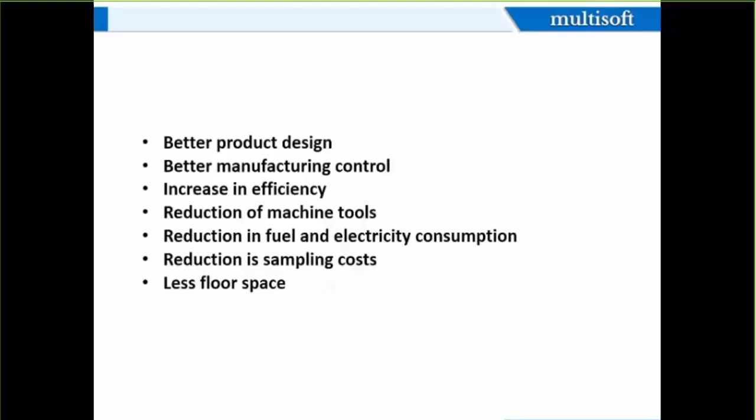So let's see some history and all kinds of things, because you know that in the Second World War - we also invented an airplane in 1903. After that we used the airplane in war. In the Second World War, they could make an airplane or a fighter plane on paper. Everything was on paper, but it's really hard to handle it. So what could we do? We made a kind of software.

So just see, there is some software from the 60s, 70s - there is one software called CATIA, which is a France-based company, from 1981 and the 70s also. Maybe you've heard about Dassault Systemes. It's a very big company of France, which especially made fighter planes of France, and is also providing to some other countries also. So they made a software for itself. It is called CATIA, and some other companies also there.

They make ProE for their own company and also AutoCAD. So basically they need a high quality product, that's why they make software like that. SolidWorks is also there, ProE is also there, and they also provide some affordable packages to other countries.

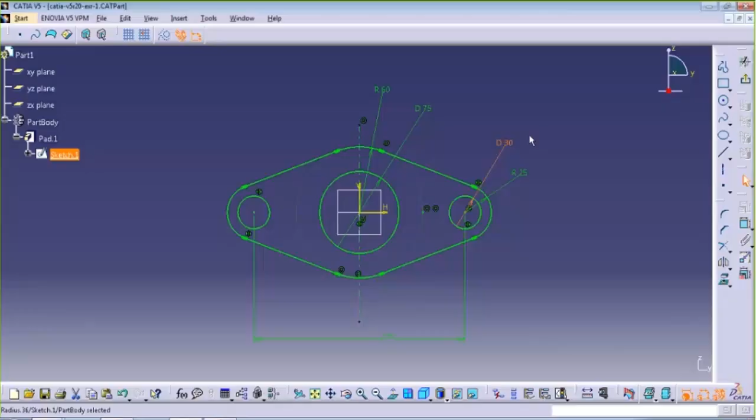If you specify, here is a 30 diameter. If you see it, here is a 30 diameter. Why did I give a 30 diameter? Because there should be a hole of 30 diameter, since we need a nut and bolt. It should be less than M30, that's why I created a 30 diameter. So everything is accounted for in that case. See, it's a very simple part.

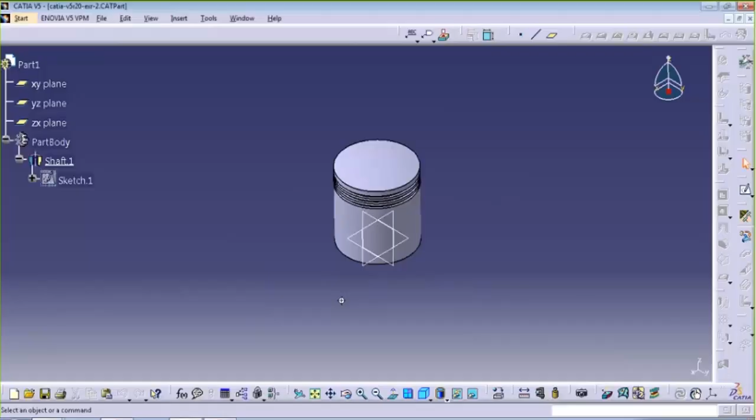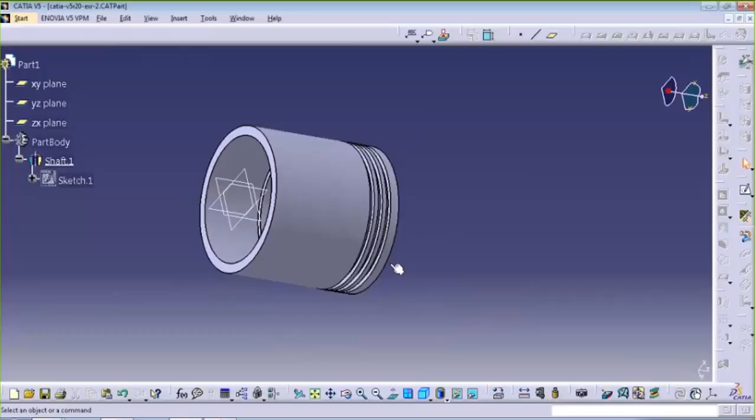Now I will show you another part. See, it's a piston, it's a circular part. If you see it, it's a circular part.

Now it's a circular part, so how would you create it? How would you manufacture it? So all of this is decided here. I will give you the section view of it. Maybe you know what a section view is. Okay, see it later.

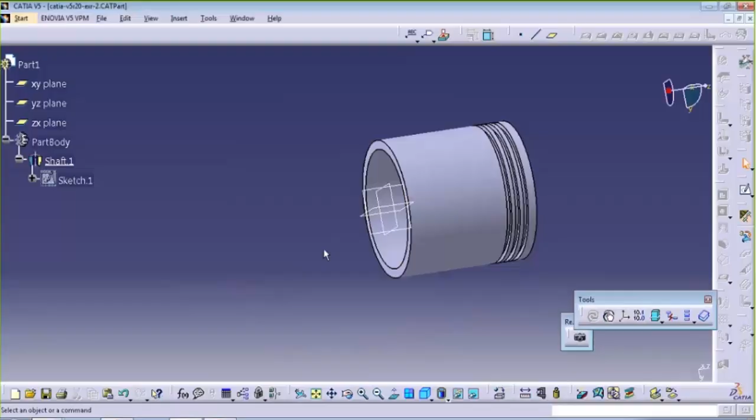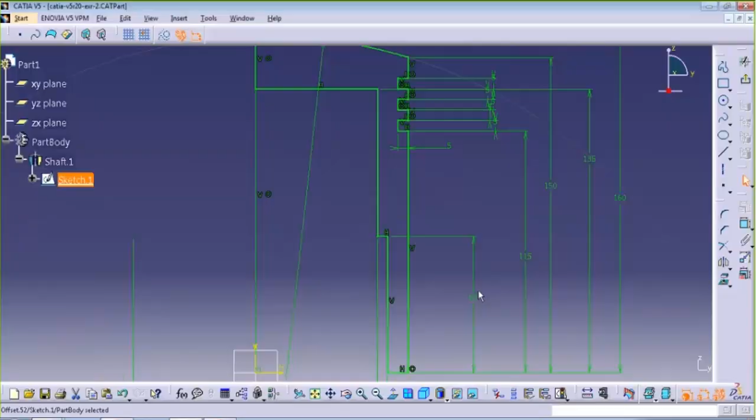You see it. Now I will give you some testing thing. See, now everybody right now is using a smartphone. So you see your smartphone, there's a back cover of it. It's not exactly the back cover of a smartphone, but it's a kind of similar thing. Okay, now how will I create it?

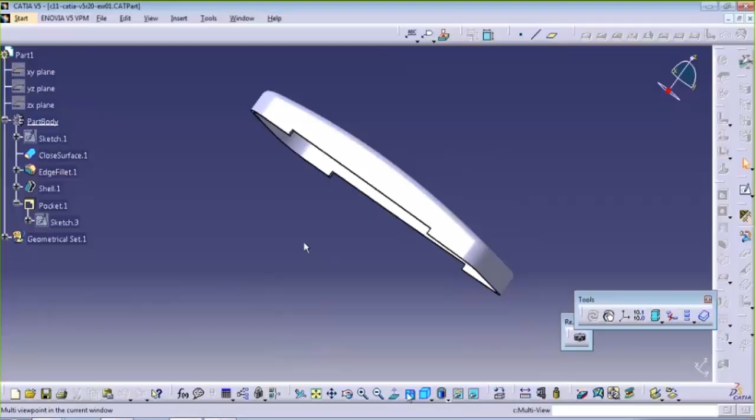Now if you see it in a different view, it shows a different side. See, there are lots of curves here, all kinds of curves. That is a curve, now there is another curve. See, the oval shape is there, and this is an isometric view.

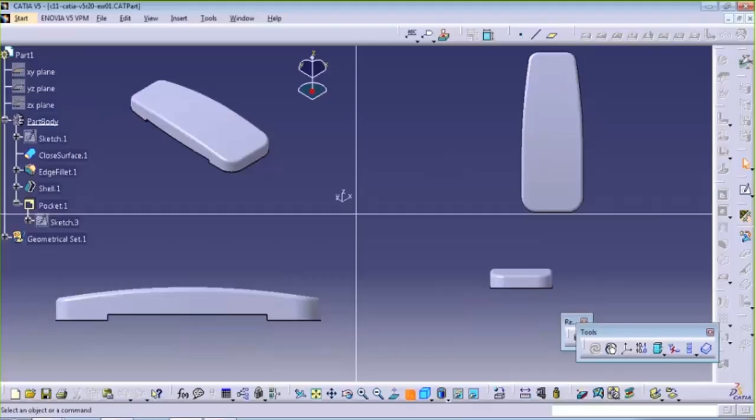So how will I create that typical part? We use CATIA. CATIA is basically used in the aviation sector. Why the aviation sector? See, if you see any kind of aeroplane right now, they are using a very good curve. Why a curve? Because they want to minimize air drag. So they use very good curves. And if you see the turbo engine, there is also a blade, and in the blade there's also a disc. So there are lots of curves.

For that kind of curve, we use surfaces. We call them surfaces in CATIA, and other software too, but mostly in the surface industry we use CATIA. So if you see, there are lots of surfaces. See how we design it.

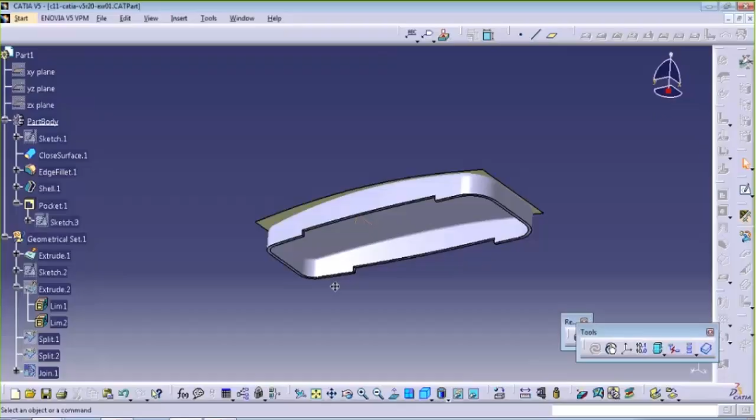If you see, there is some yellow portion. First I draw that kind of curve. I just hide my 3D model. First I draw this. Then I introduce this thing. See?

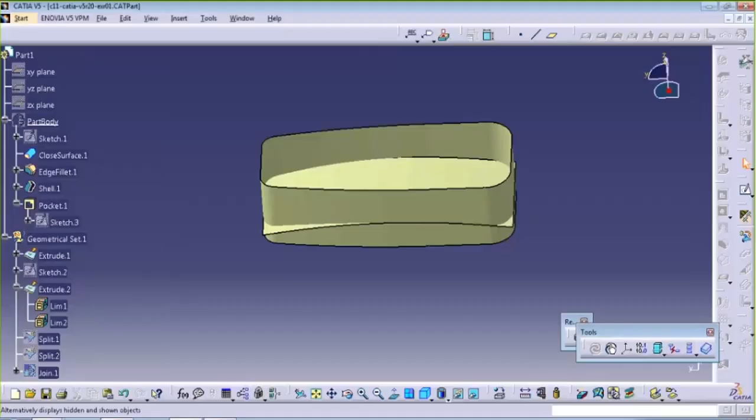Then I split it. If you've seen it, see, I have this thing. Now I split it again. We have this thing, and we have joined this. In surface designing, we can create any model, any kind of model very easily, which has any kind of surfaces.

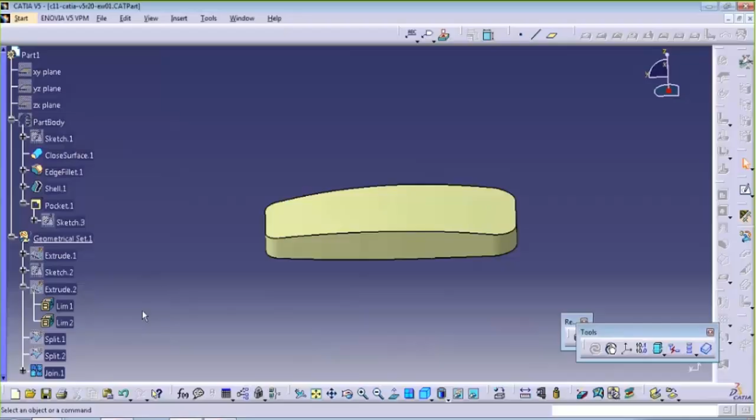Now it's a surface. If you see, a surface doesn't have any thickness. It has a negligible thickness. See, there is a negligible thickness. So we have to add material. I hide this and unhide my 3D model. See, there are some thicknesses here. So that's the difference between a surface model and a 3D model.

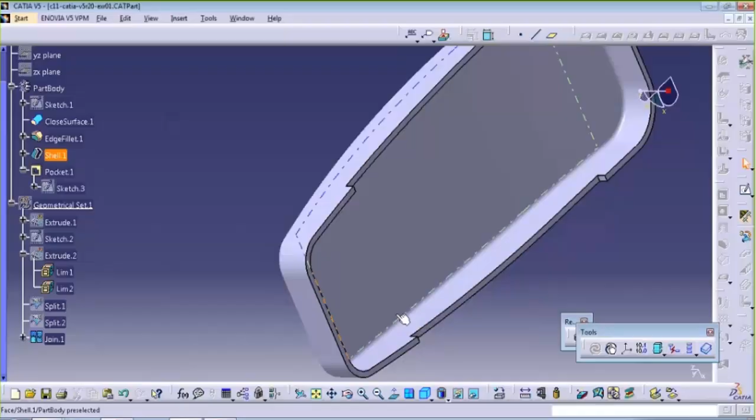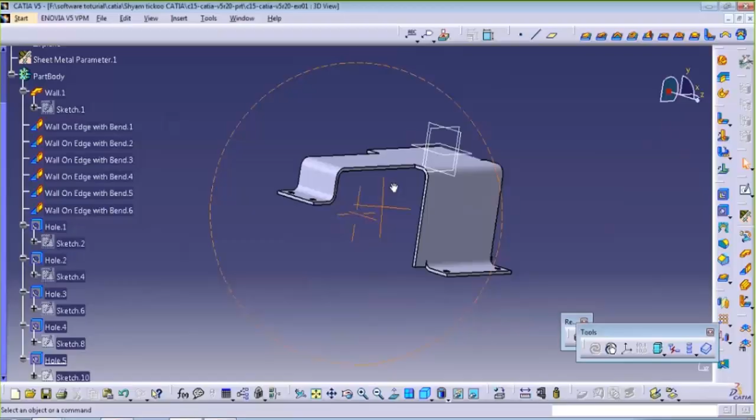Now we talk about this thing. Let's see something very simple. See, it's a sheet metal. Everybody knows what sheet metal is. Sheet metal is a specific thickness which is applied all over the part.

If you see, it's a thickness. So what is the thickness? There, the thickness is 1 mm. So 1 mm thickness is applied all over. We have an environment in this kind of software where we can provide any kind of engineering feature, whatever you learn in your technical course and B.Tech career.

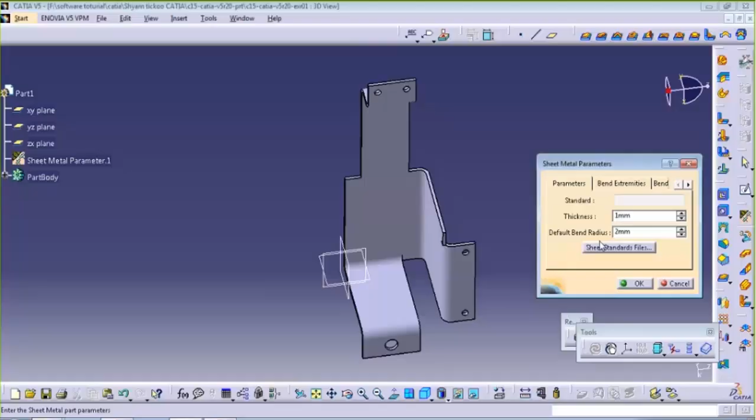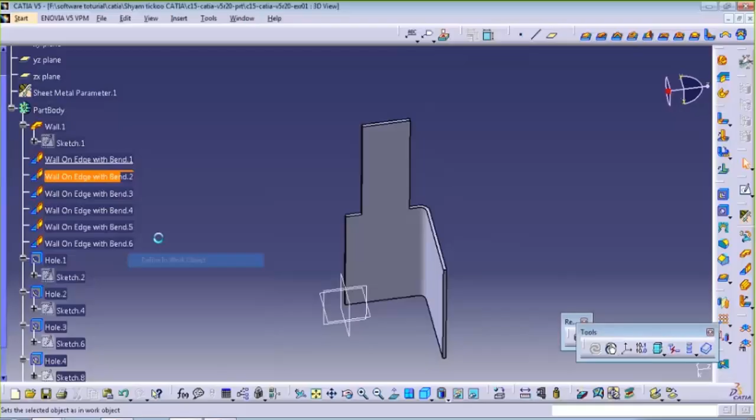So I'm providing a 1 mm thickness, and the second thing is the default bend radius. Now see, how will I draw it? First I draw this thing, then I attach a wall, then I attach another wall. I just attach walls again and again, providing a bend, so you can see here is a 2 mm radius.

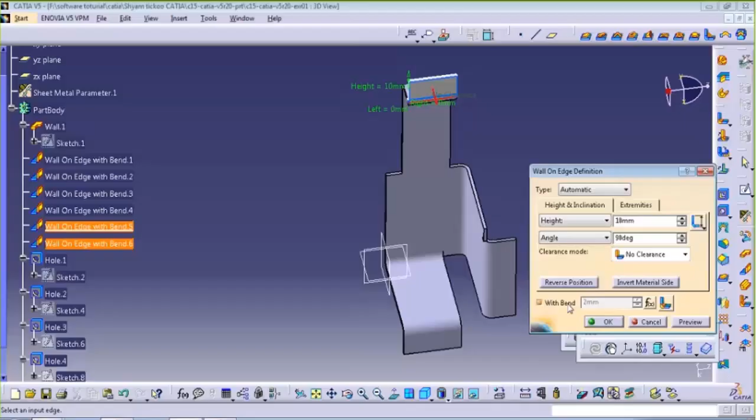So if I click here, see, it's automatically taken, the radius is 2 mm. You can change it further, and now I provided some hole there.

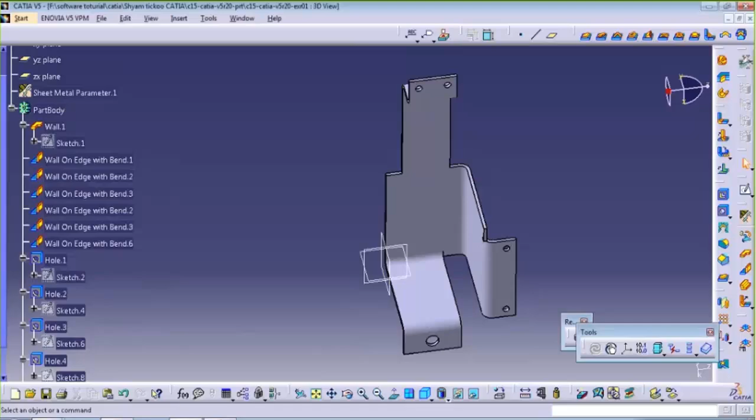Now you see, in a CAD software, except AutoCAD, any kind of CAD software has a tree on the left hand side which is very useful for working with your model. Just like I click here, so now I see this hole. I double click on it to show the specifications. It's a 4 mm hole, and you see some positions are there - 9 mm from that edge, 4 mm from the bottom edge.

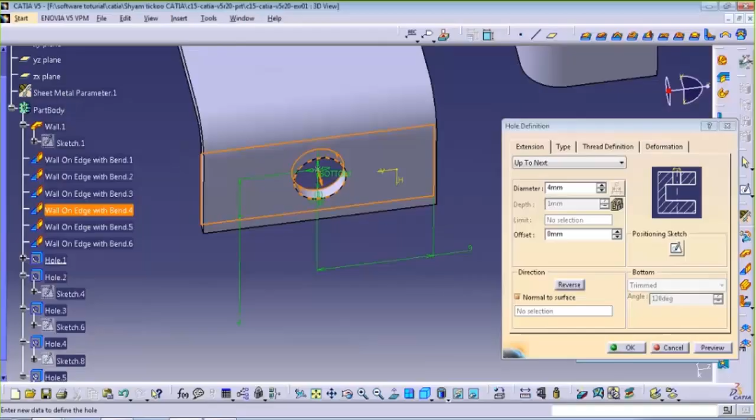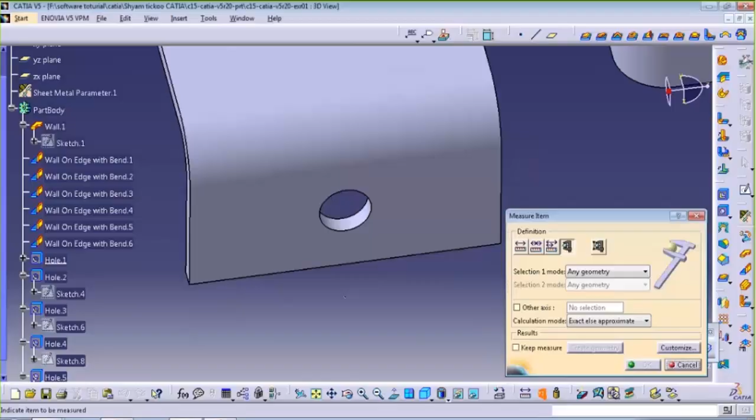So you can change any parameter at any stage. Suppose I just change it to 3. Now click OK. Now it's become 3. How will I know that it is 3 or not? I just check it. See, it's showing the radius.

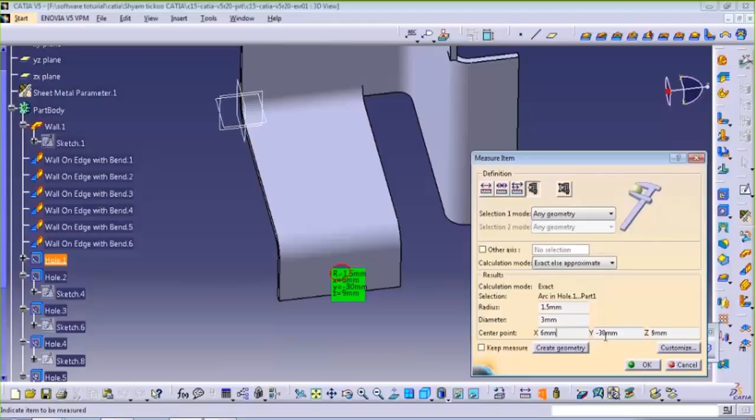So I just change it to show diameter. Now this is the diameter, and it's also showing some position in X, Y, Z, because it's a 3D model. So of course there is some 3-dimensional position, and the position is of a center point. If you want to know where the origin of this center point is, it's here - it's a cross section of the 3 default planes. You can change the origin, all things.

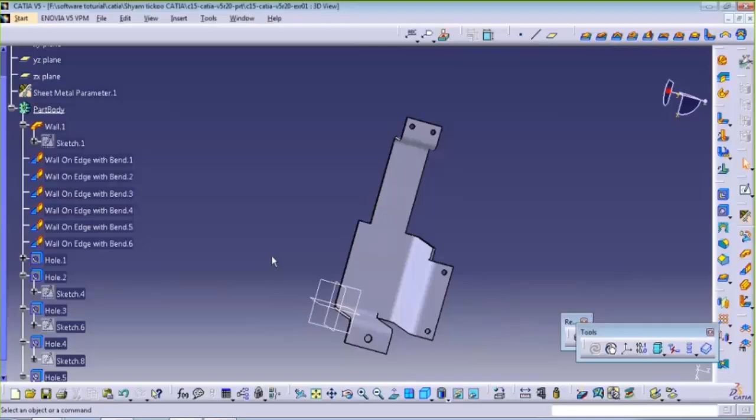Now if you see, this is my sheet metal, suppose the whole sheet metal is there, but how will you determine the raw material size? There is some other option in sheet metal. See, if I click here, now it shows the maximum dimension - the maximum length, breadth, and all things.

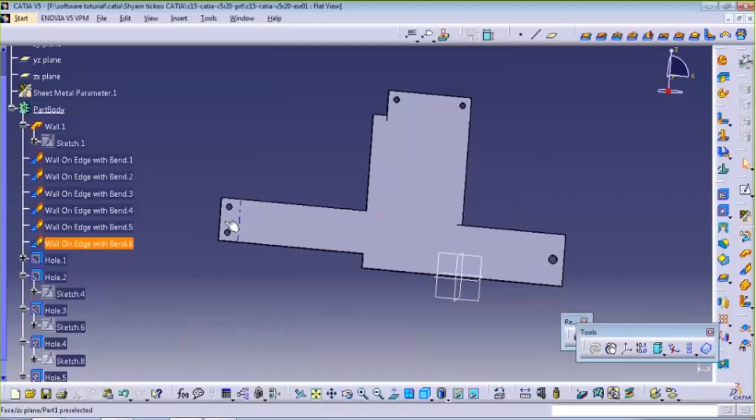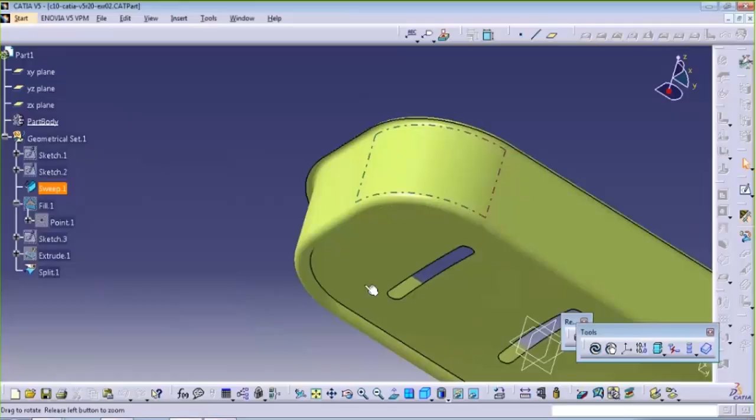Now this is some other model. See, this is like a bucket, and it's completely designed using surfaces. We don't use any kind of 3D solid model, it's a surface. If you see, there is a curve, there are lots of curves, and those handle curves too. So for that kind of typical curve, we use surface designing.

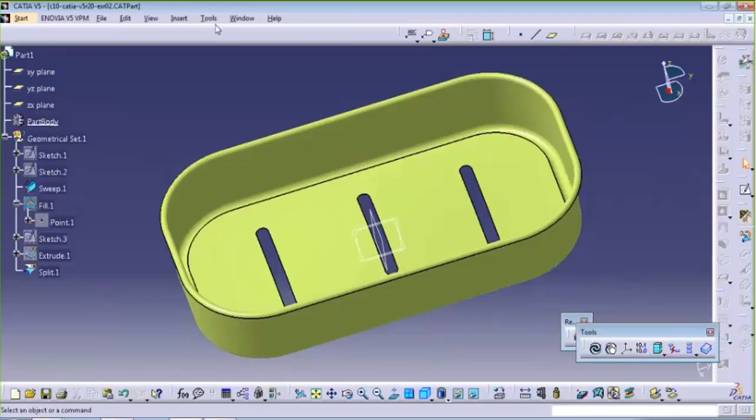Now, maybe you've seen that part before. We use that software very easily.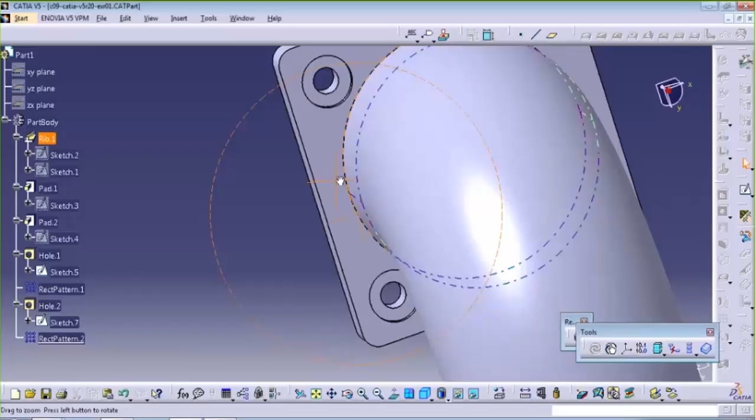Now if you see, there is a hole, there are 4 holes: this one, this one, this one. See, I just check it. First I draw this hole.

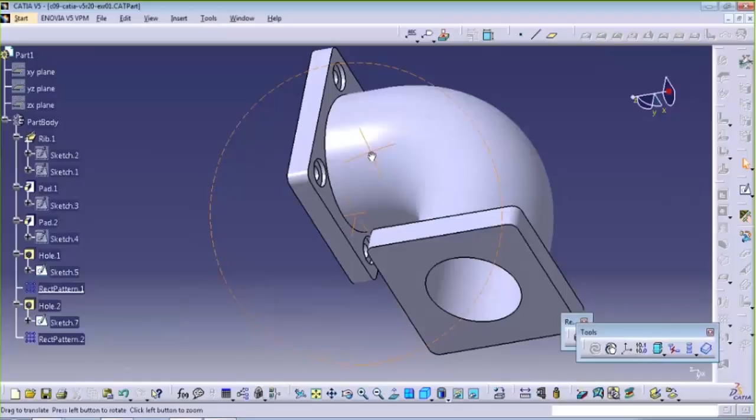Now if you want that hole in multiple positions, you can just create a pattern. So I just create a pattern. Now what is the use of that pattern? Because you have to just specify one parameter in that part design, and the pattern is just a replica of the whole parameter of it.

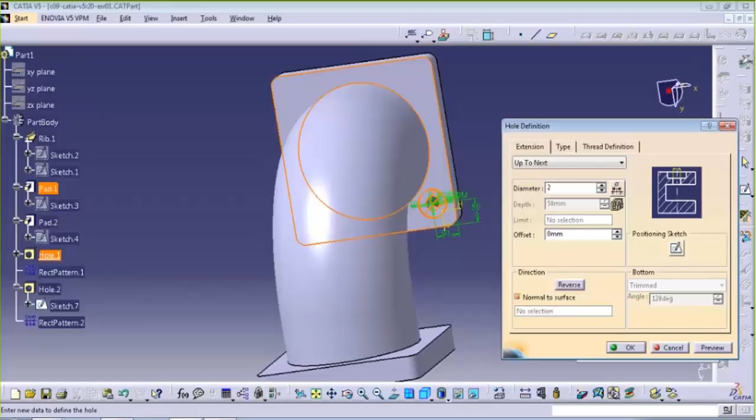So if you want to just change one parameter, say it's a 30 diameter hole with a counter bore, and the counter bore diameter is 60, I just change it from 30 to 25. It also replicates to the other three holes if I change this.

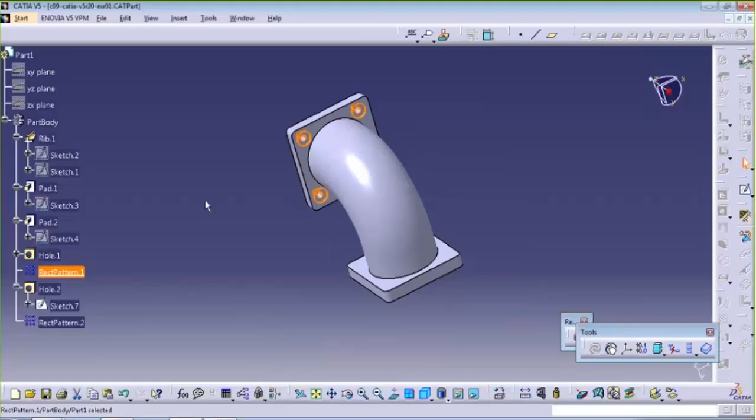So that's an easy thing when you're using any kind of design software, just like Creo, SolidWorks, Unigraphics are also there. There are some useful things there.

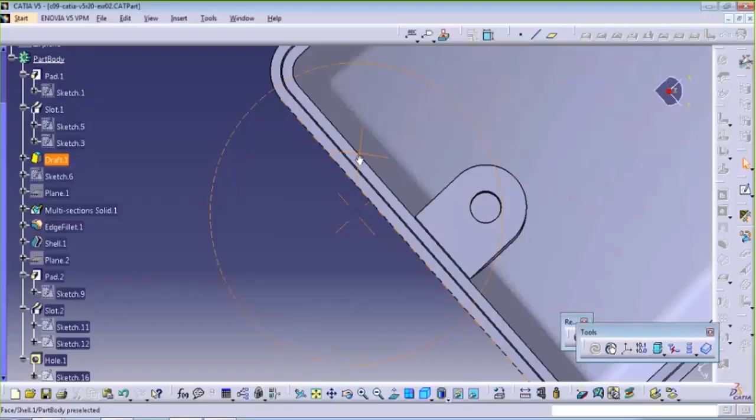Now see, there is some other kind of part. If you see, this is not sheet metal. See that carefully, this is not sheet metal. There is a gap, it's less. There is some other gap, and it's a different kind of product, because sheet metal is very hard to make like this.

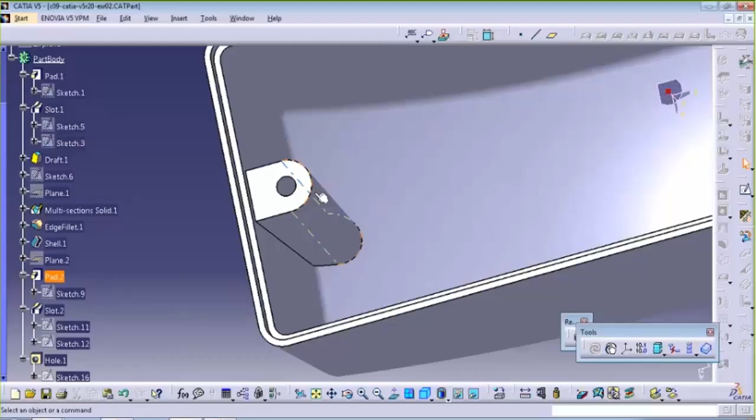Now, okay, this is all a 3D model, but in practical industry, after the 3D model, you have to represent your data to the customer and any other person, and you have to share all the 3D data to other customers. So how will you share it?

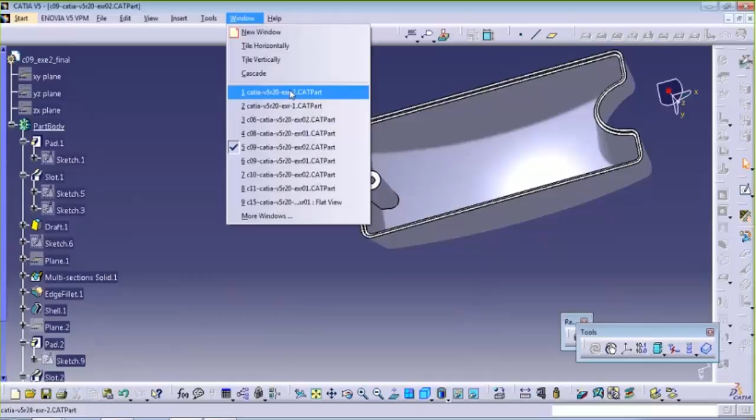You have to create the 3D model into a drafting portion, which is all the history we said, that we have created a 2D model basically. So suppose I just have this part.

Say this one, this is a simple one. So you have to create a drafting part. So how am I just creating a drawing?

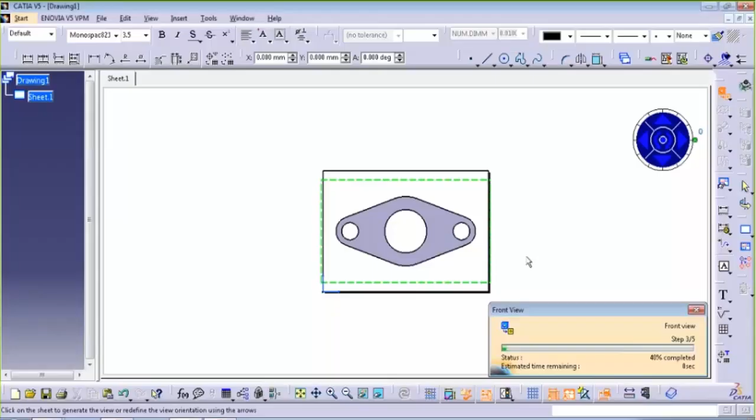Now it's showing some interesting things. It's showing the front view, scale also shows there. Now you have to specify the dimension of it.

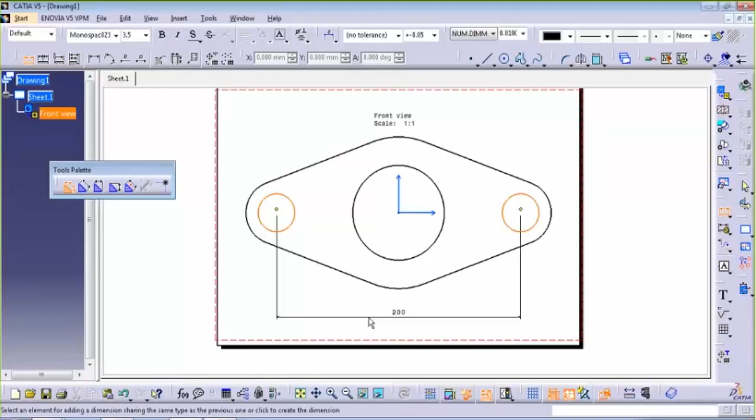So I just specify the dimensions. See this, this, this one. Okay, so I just specify the whole dimension.

And you can also specify symbols, welding symbols are also there, roughness symbols also there. And if you want to put any text here, suppose this is a circle, so it doesn't show any center line. If you want to create a center line, there are some other options too.

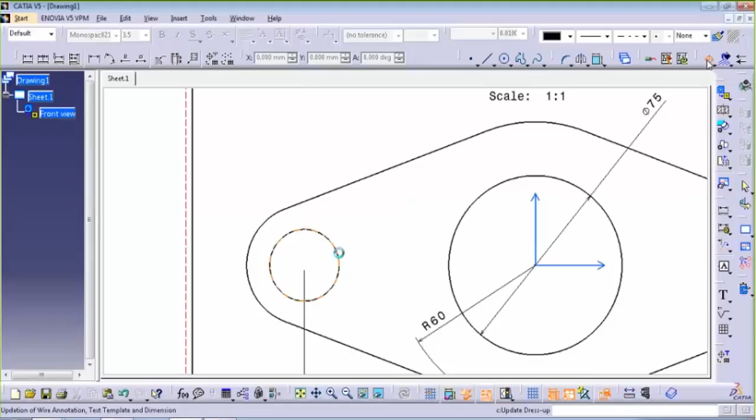See, now it's showing the center line.

See, so for a different part, we have a different approach. So it's a drafting thing.

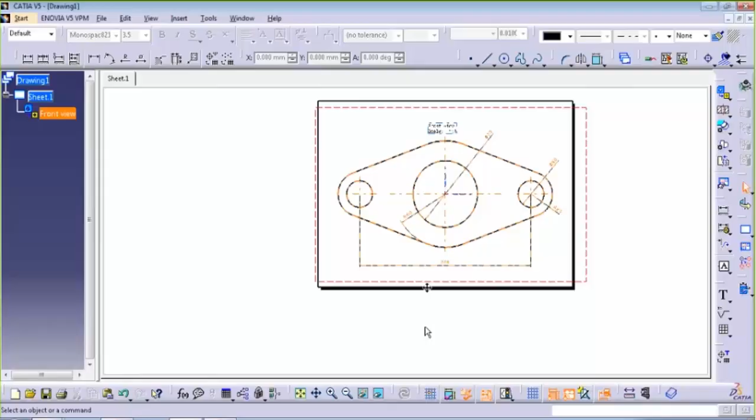Suppose I just project some another part, say this one is a piston. So I just show it like this.

But I want to see the inside of it because it's hollow inside. If you see this, it's hollow inside with some other thicknesses. So if you want to show this,

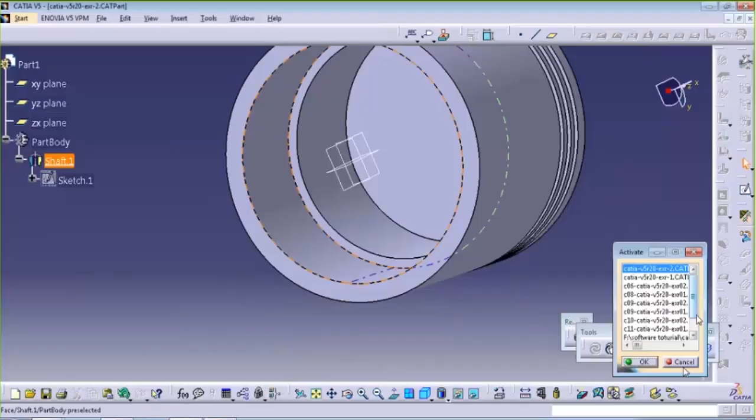I just create a cut in between them.

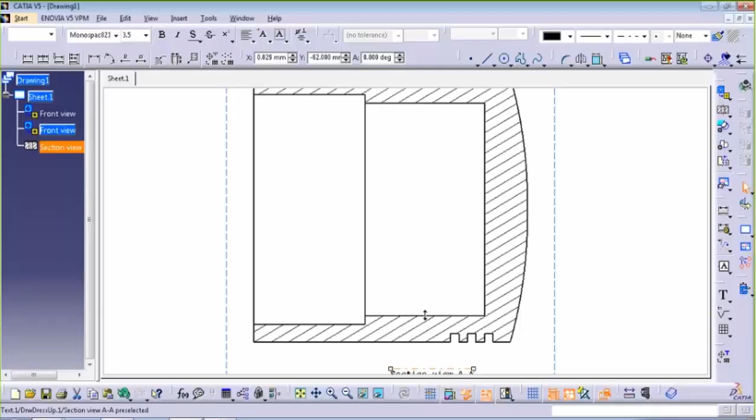See, now we have a different section of it. So if you want to specify the dimension, you can specify the inside diameter is say 120, and specify some other dimensions easily.

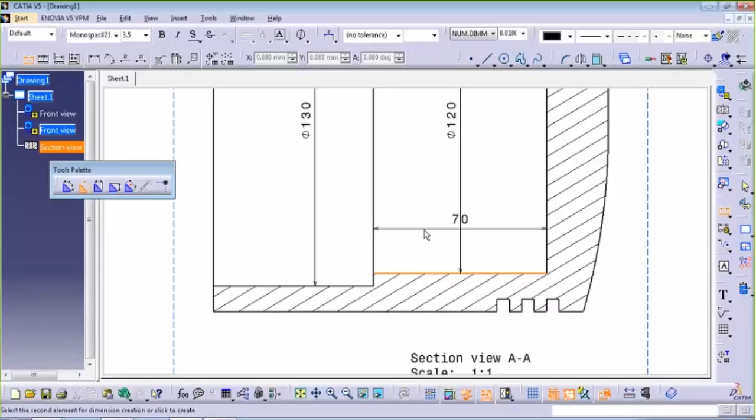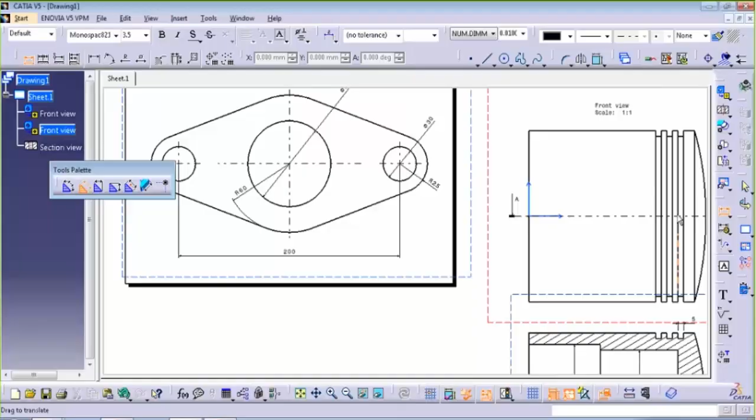So this is a very useful thing if you know the drafting part also, because when we use a 3D model, it's basically the whole thing, it applies to the analysis part also.

Suppose I just show you some analysis part in CATIA. So just before you specify any analysis part, there should be some material. So I just first specify the material.

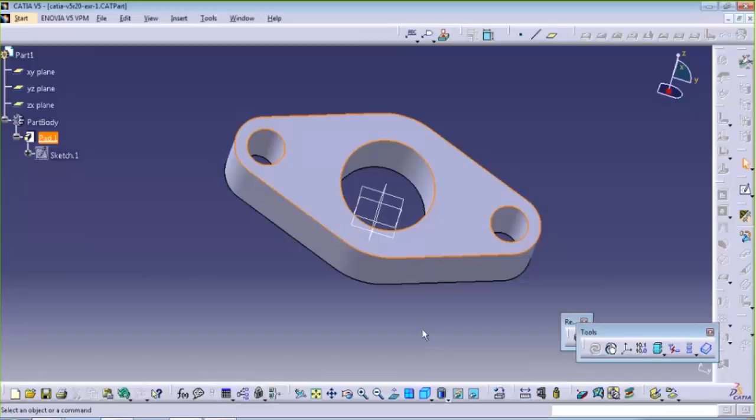So suppose this is my titanium part. Okay, if I put titanium, see, if you see in the tree, it's titanium. So I just double click on it.

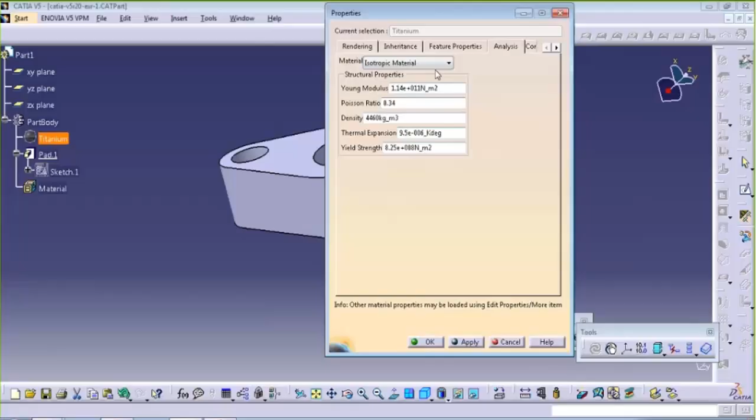See, it shows the default values: some density, some yield strength, and all the engineering properties. So I just click OK.

See, if I put titanium, the color, the appearance of this model doesn't change. So I just change the appearance. Show some black, I just put it back on.

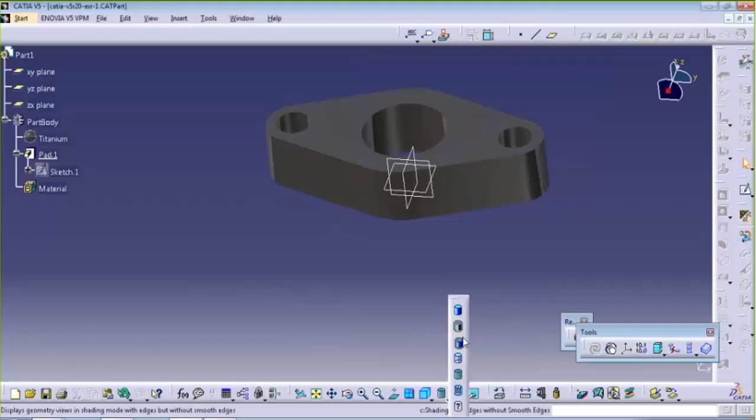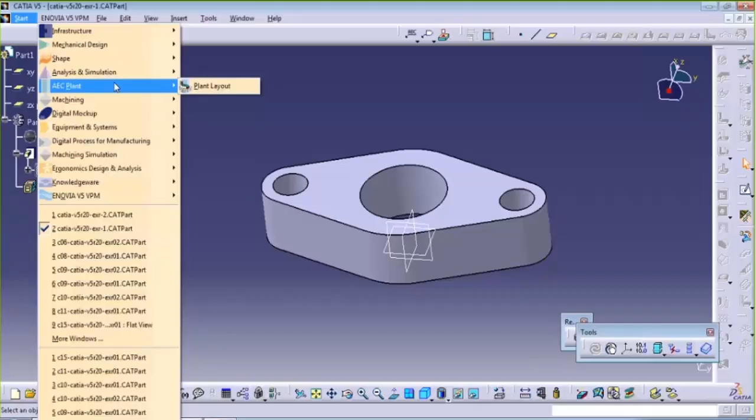Now I am doing some analysis part. Now let's see, say static analysis.

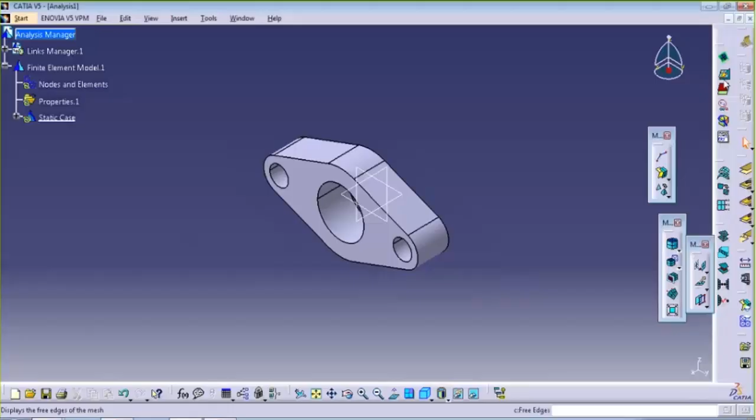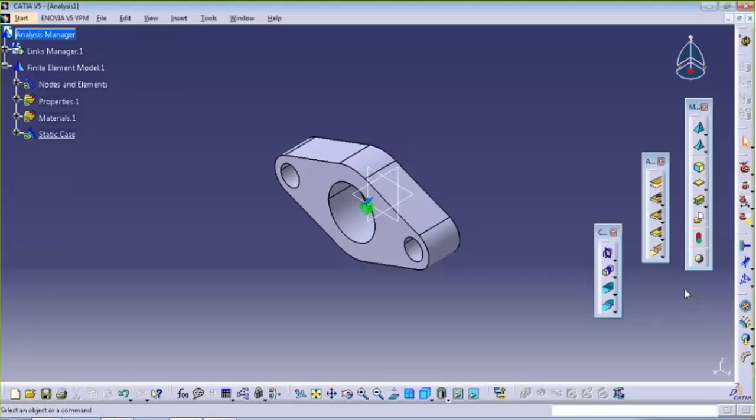Now see, I just want to fix this part. So I'll fix this surface and this surface, because this is a bolted hole, so it is automatically a fix. Fix this one, and I just put a load here.

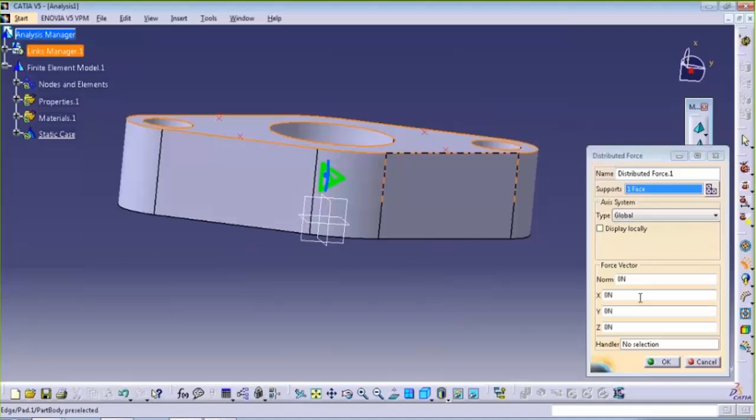Suppose on this first surface, and how much force is applied, suppose in x direction is downward. So I put in a negative 200 Newton. Okay.

Now to compute it, it's a very small analysis. Now analysis part is done. Now see the result. See,

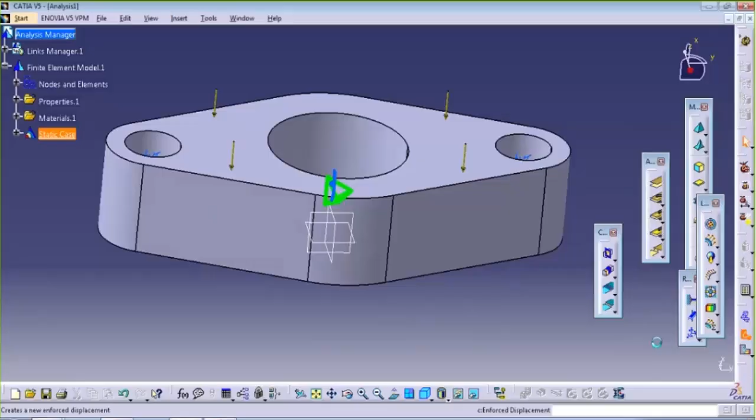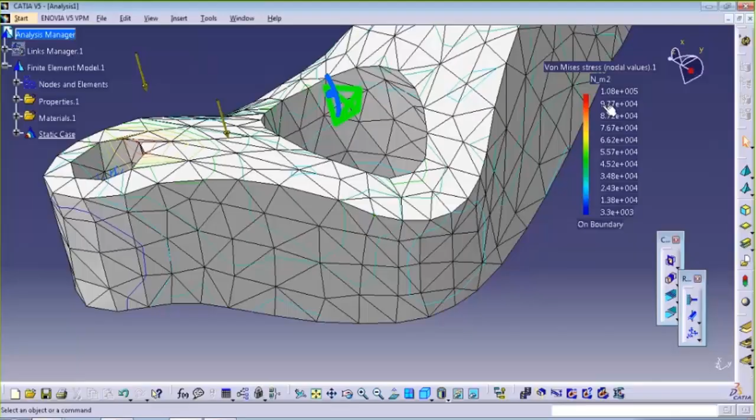See the value, and here is a color, some color distributions also there. What it shows is the von Mises stress. Maybe you've heard that term. It's basically after the load, how each and every point stretches and the pressure it sustains. So if you see, the red one is the maximum value. So where it shows that red, it's around here.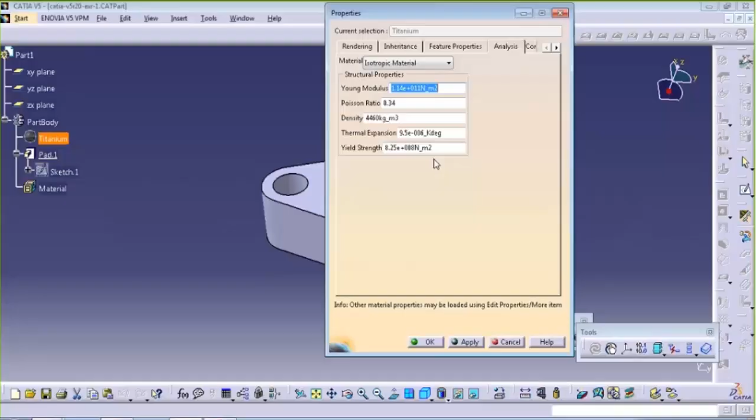See what is the value of this, the maximum is 1.08. So if you see the material, what is the material, what is its yield strength? The maximum power is 8. So it sustains the 200 Newton force downward in that direction.

So it is a very small analysis part also. You can also analyze it in different software, just like Unigraphics, ANSYS. ANSYS is completely based on the analysis part. It doesn't have any designing portion, and it doesn't have any manufacturing portion, so it's completely based on the analysis part.

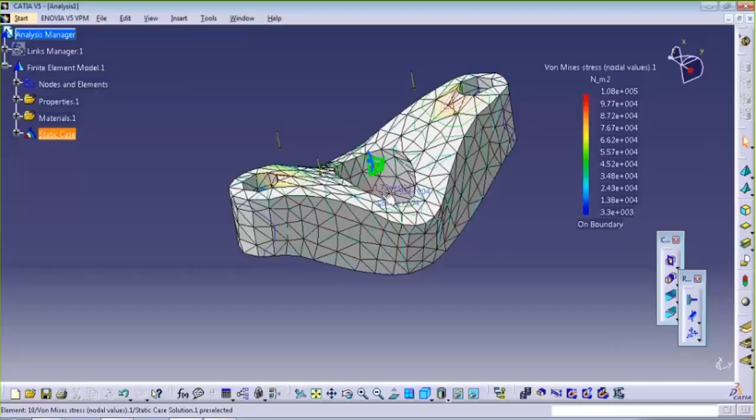But now, if you see, CATIA is capable, CATIA, SolidWorks, Pro - they are all software capable of designing, manufacturing, analysis, and simulation part. So you can do multiple things in that kind of software.

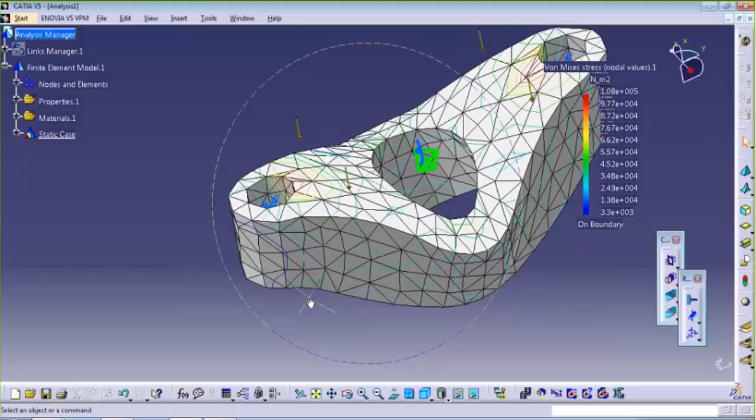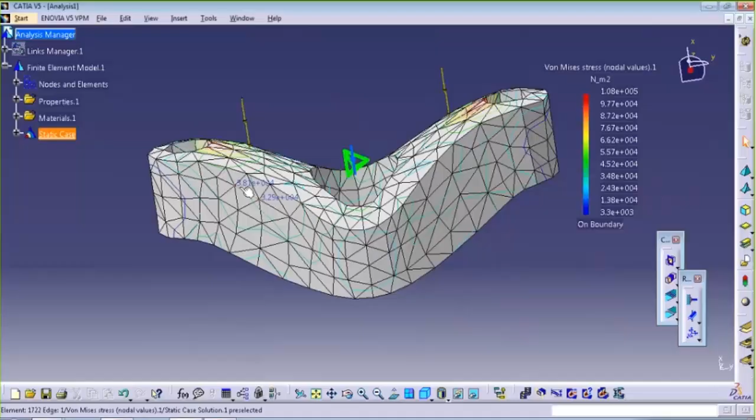So this is a very small structural analysis. You can do any kind of analysis, if you want to do thermal analysis, suppose it's heated to some 500 Kelvin, that's also provided. So I'll just close this.

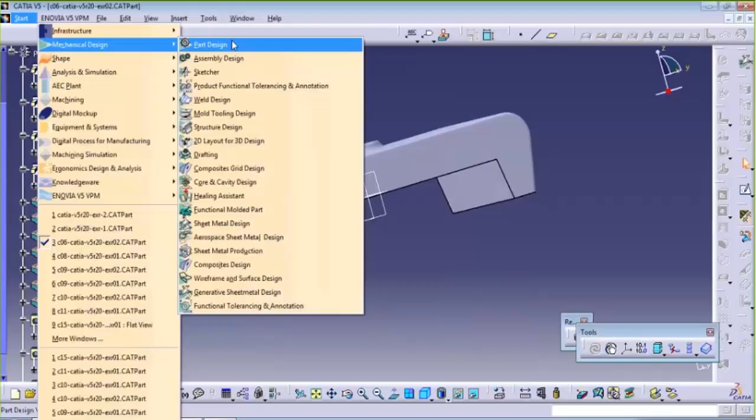Now I will show you some designing parts also. Now you see there's a single part I will show you, but you can also assemble them.

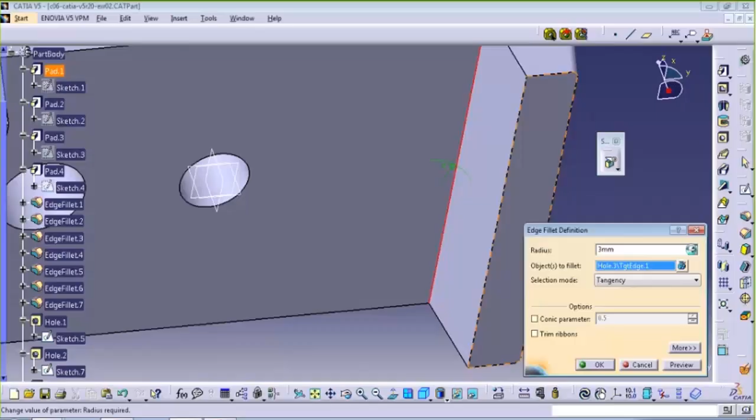So if you want to change it easily, see this. So you can also give it an assembly part.

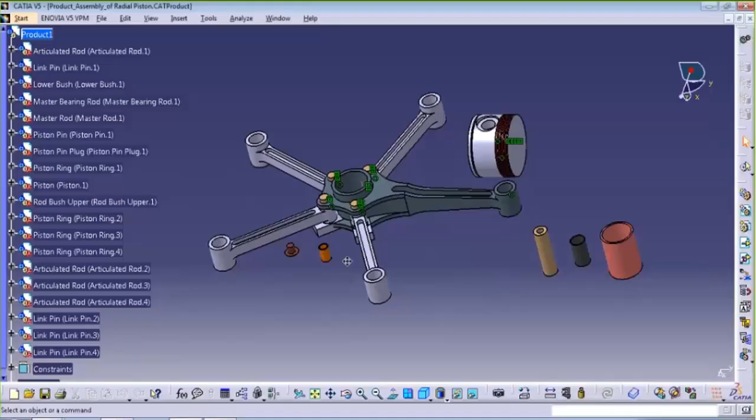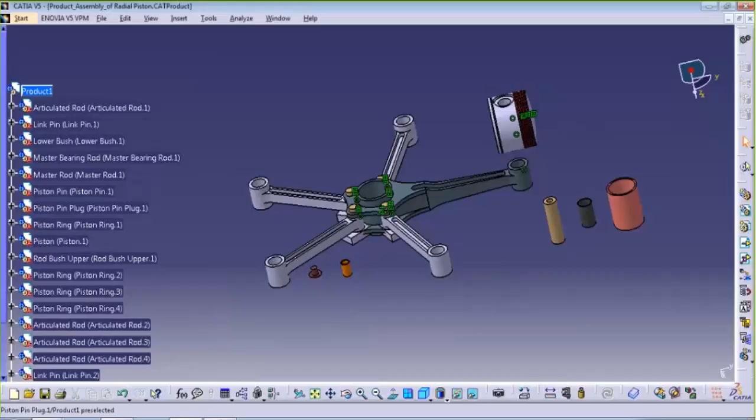This is a radial piston. So if you see in the tree, it shows some different parts. It's a lower bush, master bearing. See?

So I just hide this. That's kind of how we can also make an assembly here.

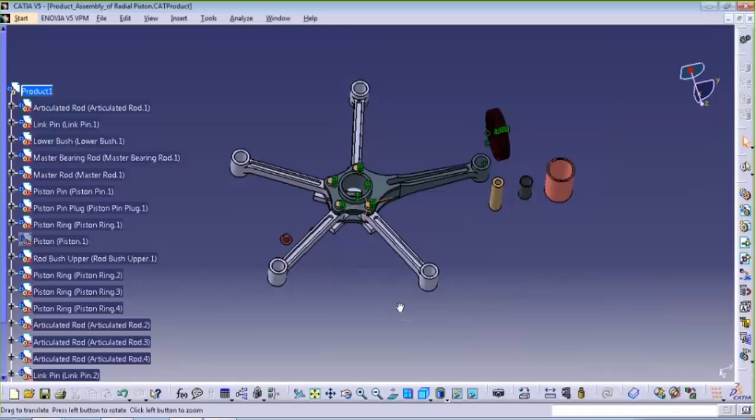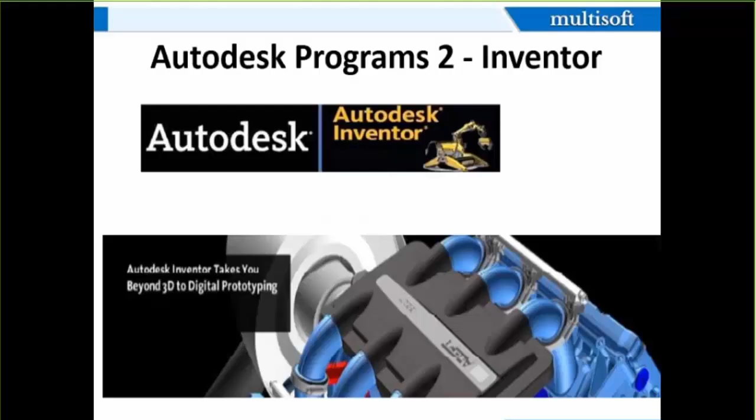Okay, now back to the PPT. So I will show you some designing portion and some analysis portion in CATIA.

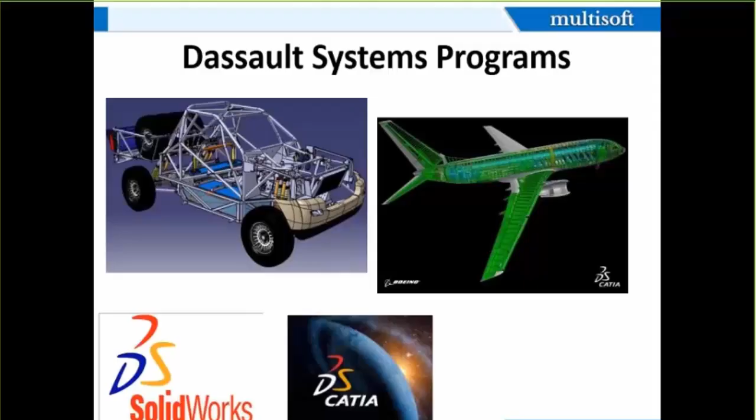So there are other examples, CATIA and SolidWorks. CATIA is, just like I told you, a CAD CAM CAE package, and so is Pro and SolidWorks. This is basically used in aviation, mold design, HVAC industry, power plant, power sectors. So all kinds of companies and industries are using this software.

You can also say Unigraphics. Unigraphics is also very useful in the industry, based on molding design and car manufacturing. They are all using that kind of software.

And ANSYS, just like I told you, is completely based on multi-physics. It's mostly used in civil engineering, testing fuel, and thermal analysis of computer parts and computer chips. They are all using it in that kind of industry.